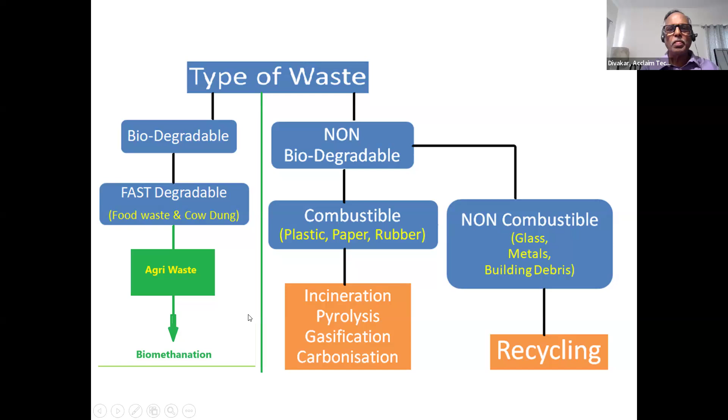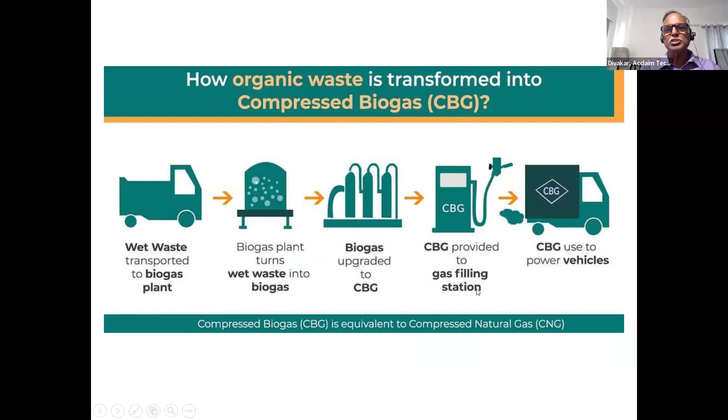Organic waste is transformed into compressed biogas. This is the scheme of things: wet waste transported to biogas plant, biogas plant converts the waste, there is a preparation going on, biogas upgraded to CBG. We are compressing it, cleaning the gas, because the raw gas has only about 55% usable gas. So we clean it up to reach 90 plus methane. Then CBG is provided to the gas filling stations. This is compressed at 210 bar and transported to the filling stations.

So what is biogas? It's a gaseous renewable energy source produced from plant and agricultural waste by anaerobic digestion, organisms or methanogens in a bioreactor. So 65 to 70% is the methane you get in normal biogas decomposition, then carbon dioxide, H2S, and we clean up the traces.

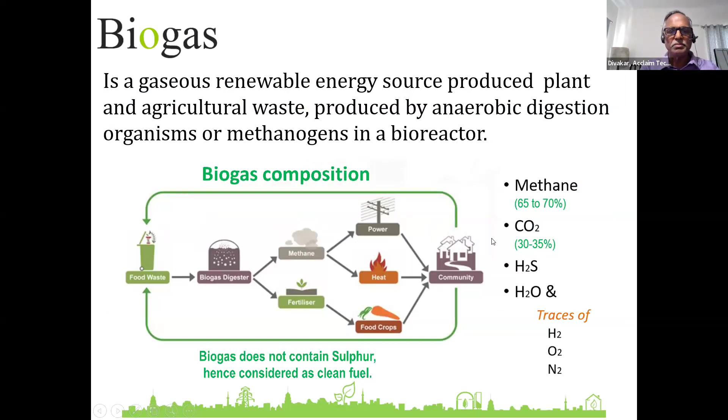There are different types of biodegradable waste: animal waste, mainly agricultural waste, grass and garden trims, dry leaves, sawdust. Whether commercial crop or food crop, only less than 30% is the useful or digestible product - the rest is all wasted. This waste is a resource which we are destroying by burning or mulching, contributing to global warming.

If you look at the scheme of things, when you burn it, you generate carbon dioxide. When you cut it and put it into the field, it leaches, and the gas that comes out is methane, which is 20 times more dangerous than carbon dioxide.

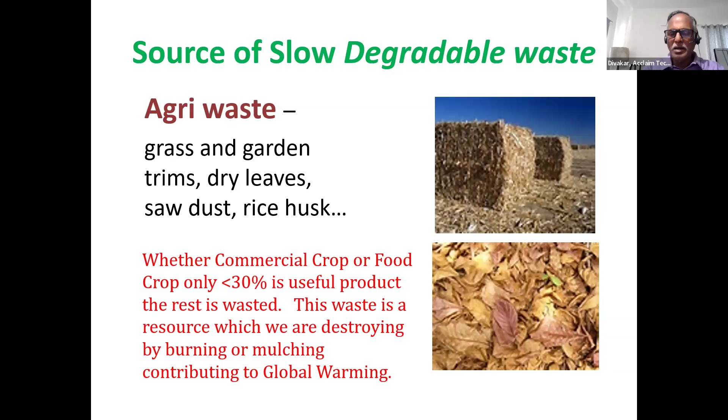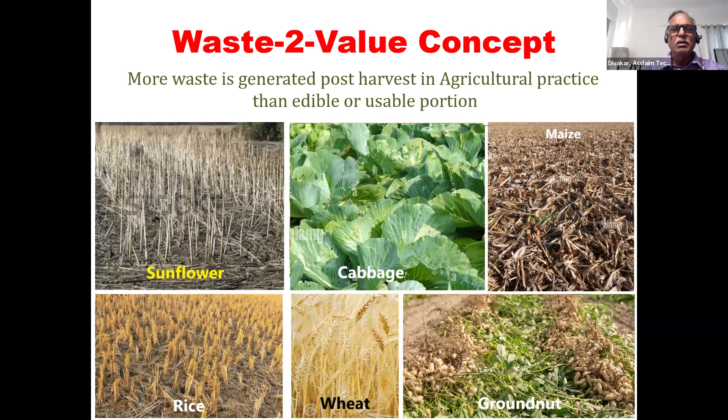Waste to value concept - that is what we are talking about when harnessing this for biogas. More waste is generated post-harvest in agricultural practice than the edible or usable portion. Take sunflower, this is major waste, cabbage after harvest, maize, rice, wheat, groundnut - any harvesting method, whether food crop or commercial crop, our requirement is only 30%. The balance of 60 to 70% is either mulched or burnt. So we are going to concentrate on this thing which we are wasting.

We can also grow grass, we can also grow crops which can be used for compressed biogas. So here what happens is we will not have a conflict with commercial crop or food crop. Wastelands - they are wasted lands - this is where we are talking about growing captive plantations for making biogas. So this is the new alternative for replacing fossil fuels.

So Napier grass - we have different varieties, CO2, CO3 - these are also improving with each research. It's a high yield dedicated energy crop as a low carbon renewable replacement for coal to generate electricity and heat, and as non-food feedstock for second generation liquid biofuels to replace fossil fuels such as gasoline and diesel fuel.

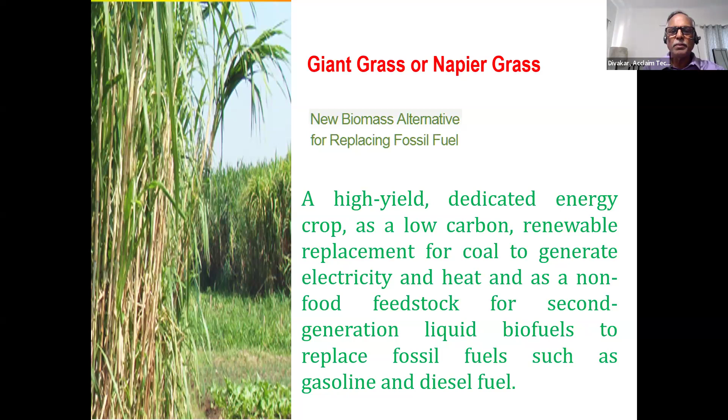So why do we choose this? There are already invasive species, and you must have seen Madras High Court has brought very strong strictures that this should be eliminated. They only said it should be eliminated, but after elimination, what to do? That has not been specified. That is where entrepreneurs have to come in, government has to come in, and together there should be a program where we can have this as a resource for generating biogas.

So now captive growing of Napier grass has its own benefits because we have control on the yield, we have control on the raw material pricing, which is very essential for a profitable bio-CNG project.

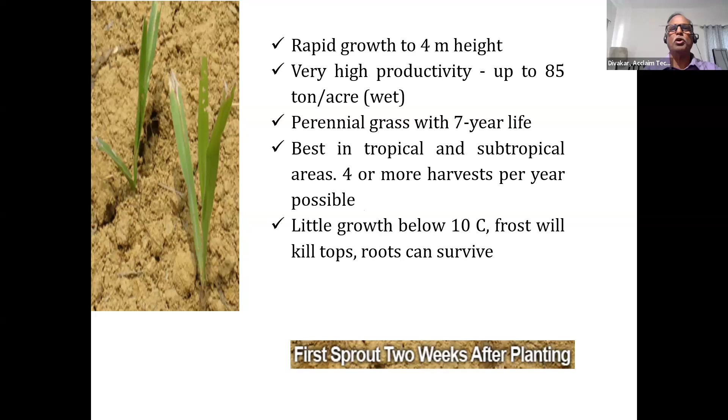So these are also resources for bio-CNG: water hyacinth, Juliflora, that you see all around. This is what the government and the court have said has to be eliminated. These are again resources. It has got a resource both as biomass and as a raw material for biogas.

Our experiment with farmers has shown that it gives a better yield of 20 to 30%. Number two, the health of the plants is better, so you require less fertilizers and pesticides.

So this fuel that comes out, we clean it up, and this raw gas can be directly used for heating. But when we want to store it and transport it, then we have to go in for compression. The compression is needed because it's a lean gas, so we have to compress it at more than 200 bar, which is an exercise in itself and is the most expensive component of the whole system - cleaning and compression.

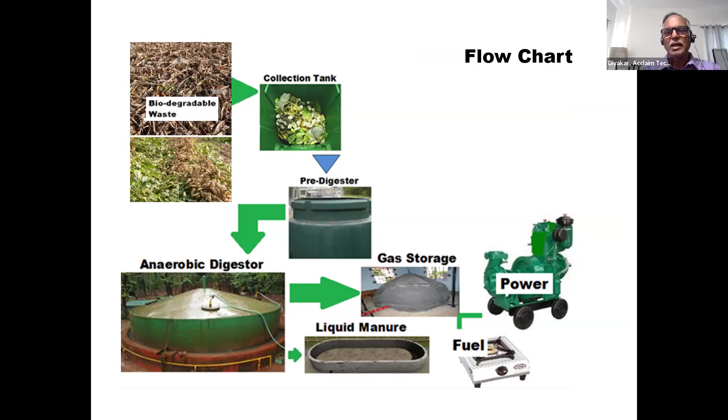So it can be used for power or it can be used for fuel. A 500 kg system can always save around 1,000 LPG cylinders per year.

So this is the typical savings in a biogas plant, which we have arrived at with numbers we have calculated. These details I can share with people who write to me. I will show you my address where you can contact me in the last slide. You can note it down, but just understand that if you are processing a waste of 1,000 kg per day, it will give you a return of 11,88,000 rupees per annum.

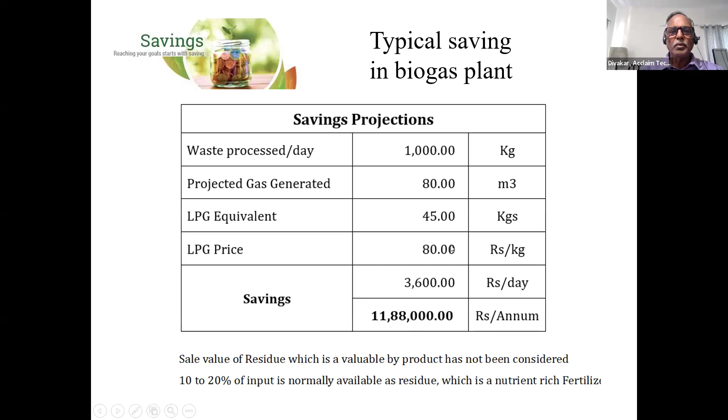These are the main components of the biogas plant. It has a bioreactor. First is the raw material processing, which varies crop to crop or whatever your input is. Then you have the residue tank where the substrates come in after gas generation. These are the balloons where we store the raw gas and also clean the gas, and then we compress it and send it into cylinders.

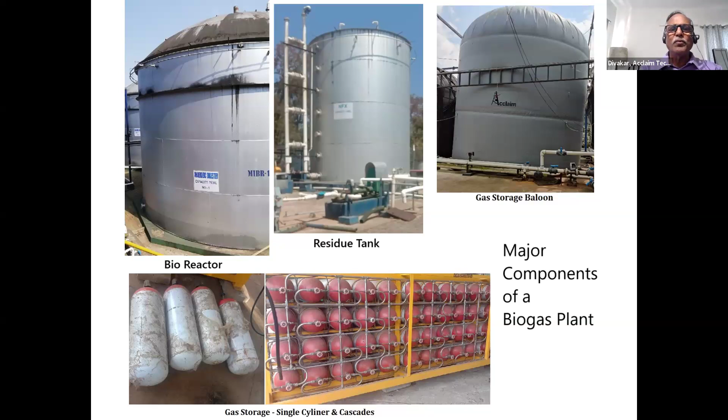These individual cylinders we use for domestic purposes and for canteens and others who use lesser volume per day. Then we convert it into a cascade and transport it. The problem we realize is that since it's a lean gas, a 10-ton truck can carry only 1 ton of this gas. So this is a major challenge and a cost component.

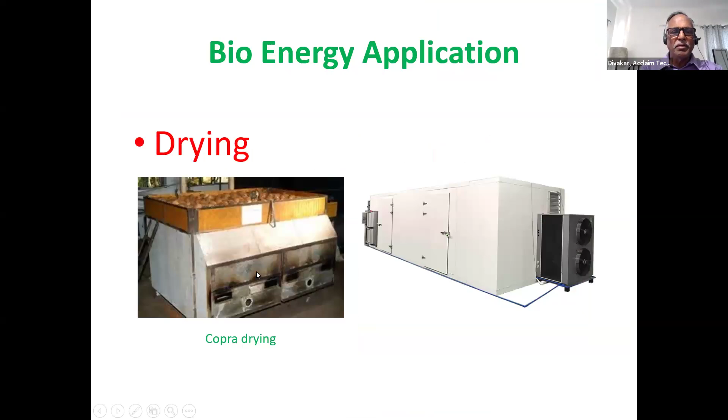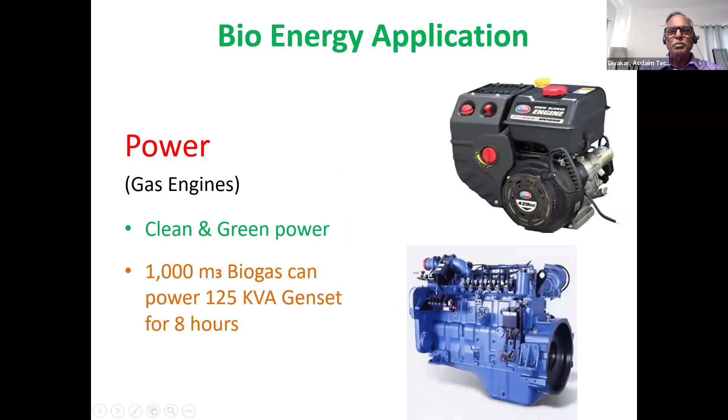Then power - we can use it for power generators using gas engines. Now options are available. Vehicle fuel also - it was used during the World Wars. Today we are using CNG kits. So this is an ideal one which we are doing from 100 kgs to around 500 kgs.

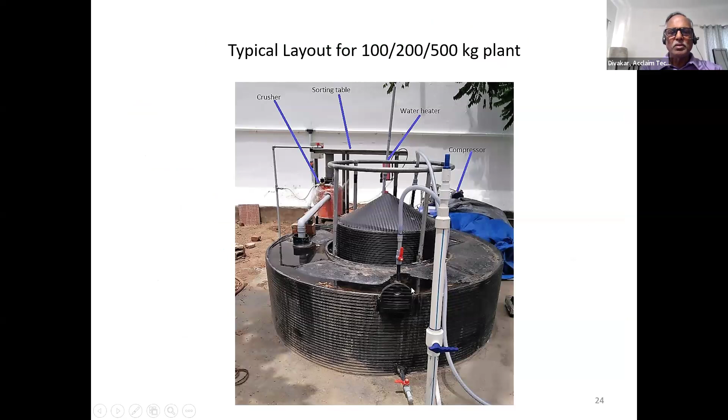This comes in an HDPE plant. It is an independent unit which is a plug and play system. So this can be done with HDPE. It has got a life of around 15 to 20 years.

The solid, 10 to 20% of input, and liquid byproducts are nutrient rich and can be used as manure. As I told you earlier, this manure is nutrient rich, and our field experiments have shown nearly 30% more yields and a strong immune system for the plants, which requires continuous application over a period of time. It is reducing the input requirements of fertilizers and pesticides.

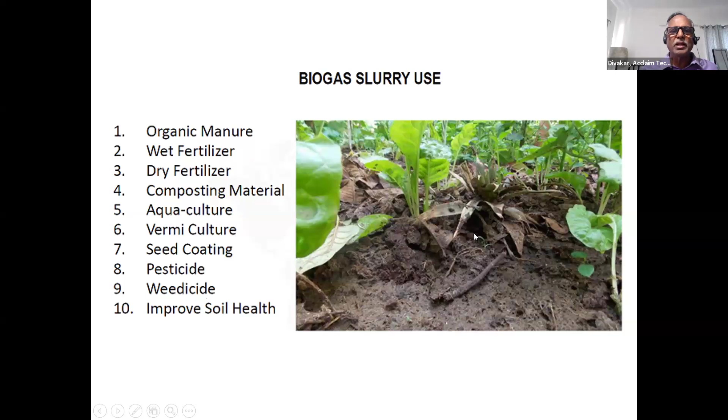This is the organic bio slurry that comes out. Depending upon your input, around 10 to 20% of this will be available - organic manure, wet fertilizer, dry fertilizer, composting material, aquaculture, vermiculture, seed coating, pesticides, weedicides, improving soil health. All these benefits come with this. Available in standard sizes, or we can custom engineer to larger sizes also.

As I told you, if it is a canteen or somewhere where the gas is generated in-house itself, we can set up this plant and the gas, without cleaning, can directly be used in the kitchen.

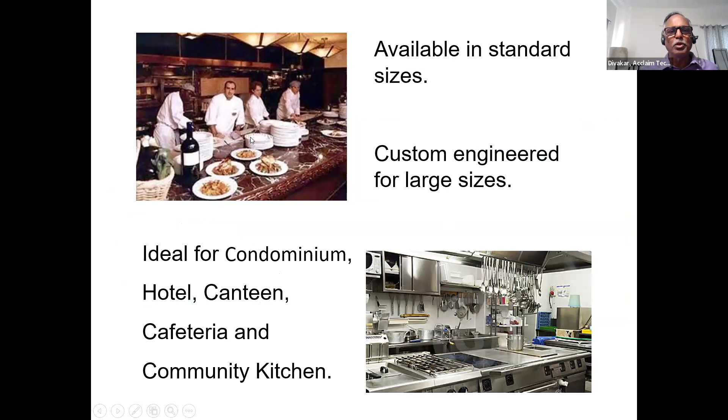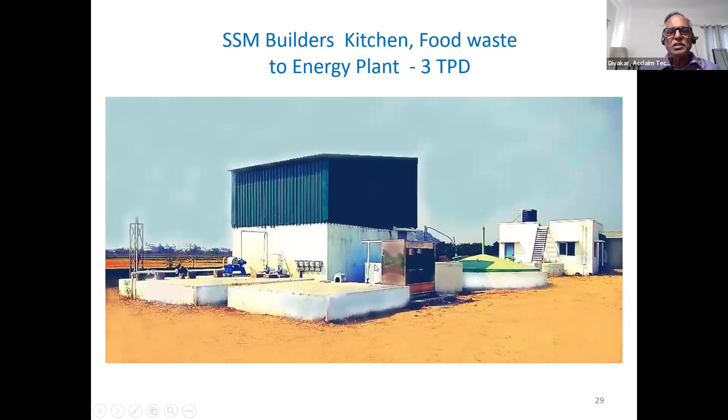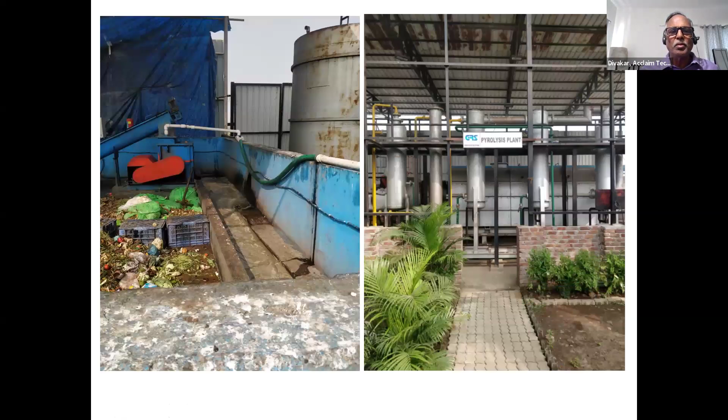This is a CSR project by our colleagues in Kalyan, where it is a 25-ton plant which is using MSW, biodegradable MSW. This is a containerised biogas plant which is standardized for 2-ton. So for space constraints, we can take it directly and have it. This is also a plug and play system.

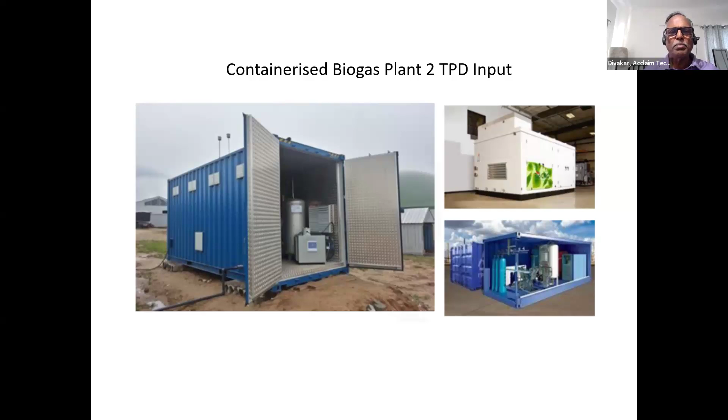This is our plant which we have set up. This is a 4-ton plant, 100 TPD input, and the output is around 4 tons per day.

The raw material used here is mucilage, that is coffee waste. The challenge here is that this coffee waste is available only during a specific period, around 3 to 4 months in a year, and then after that, what to do is a challenge. That is where we have to take into consideration when we are looking at seasonal products like press mud and all these things, what to do with that after that.

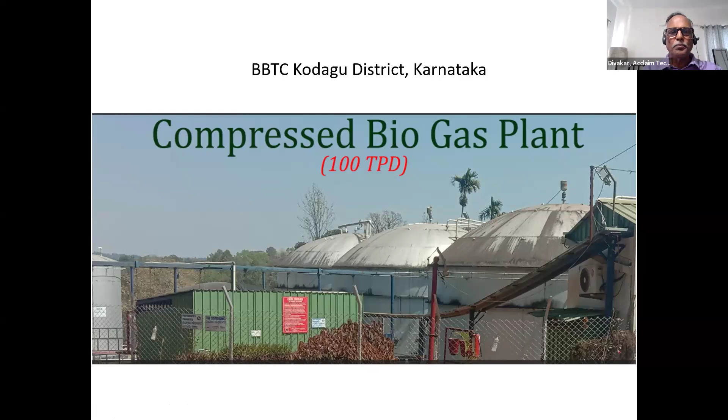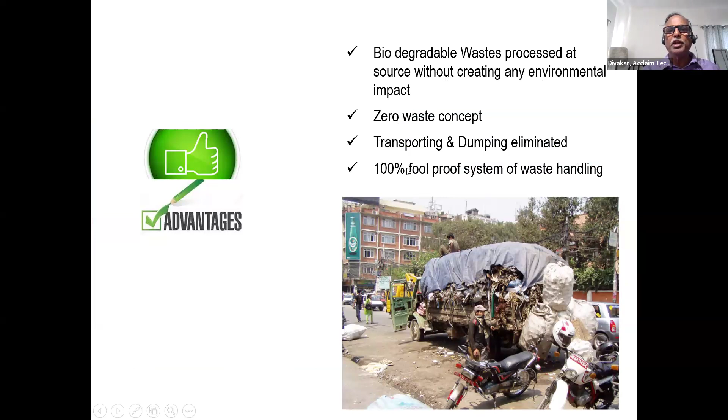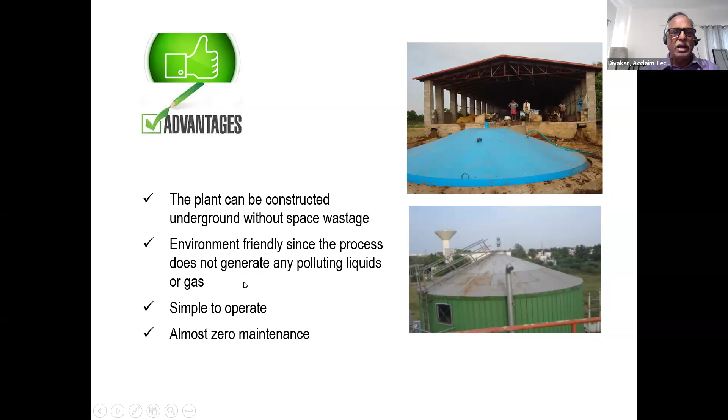The advantages: biodegradable waste processed at source without creating any environmental issues, a zero waste concept. Transporting and dumping eliminated because we can have small plants at different levels, or process them there and transport it, which reduces transportation cost by around 60 to 70%. The plant can be constructed underground without space wastage, environment friendly since the process does not generate any polluting liquids or gas, simple to operate, almost zero maintenance.

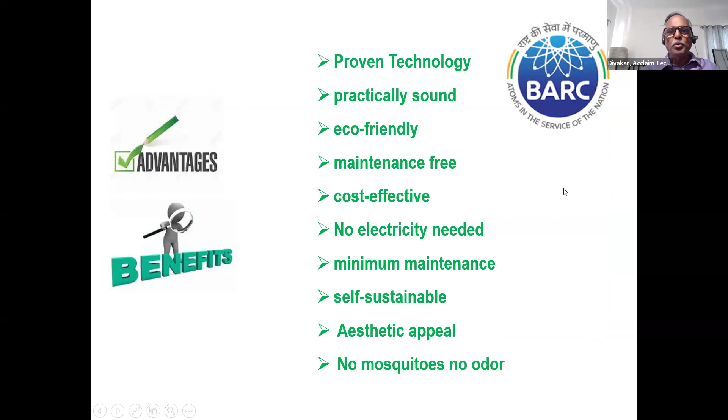It's a great thing. See, the pollution and air quality issue that you are facing in Delhi and NCR is because of stubble burning. This is an ideal solution for stubble burning, provided the government comes on a partnership basis, because the cost of these projects are minimum. For a 3-ton project, it will cost around 17 crores.

As a thumb rule, 3.5 crores to 5 crores per ton of output, gas output, depending upon the location, the raw materials, and how much technology and automation should go into it.